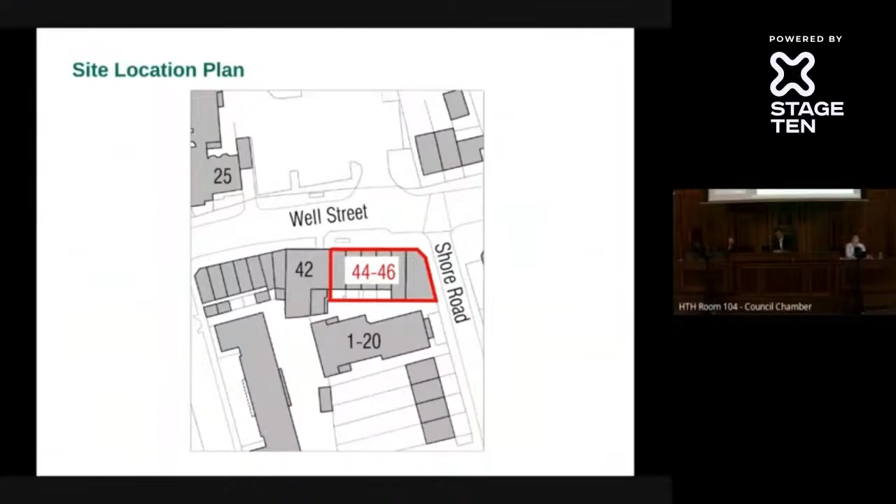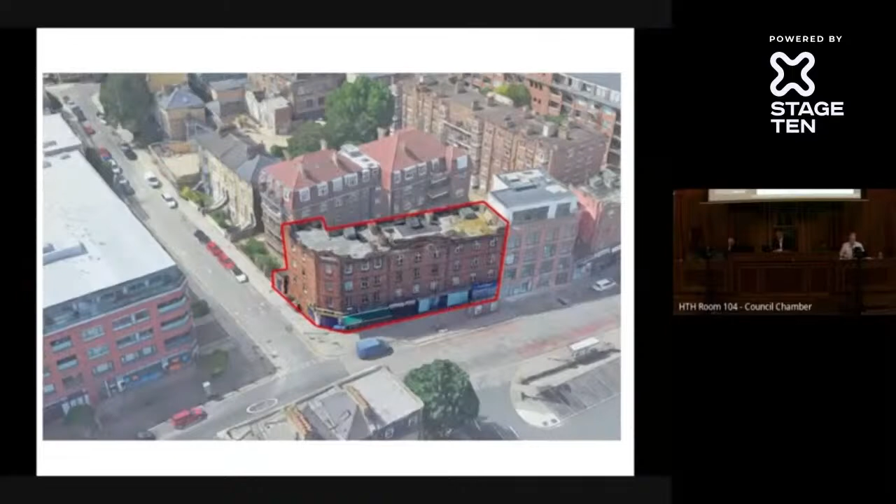So it's on the southern side of Well Street at the junction with Shore Road. This is just a photograph of the site. The application before us is actually for a variation of an existing planning permission, relating to this 4-story building which has commercial uses on the ground floor and residential above.

Just to run you through the existing plans - this is the elevation along Well Street, and then the rear, where the access to the residential flats above is located. They all have deck access, with entrances on Shore Street, which is just here.

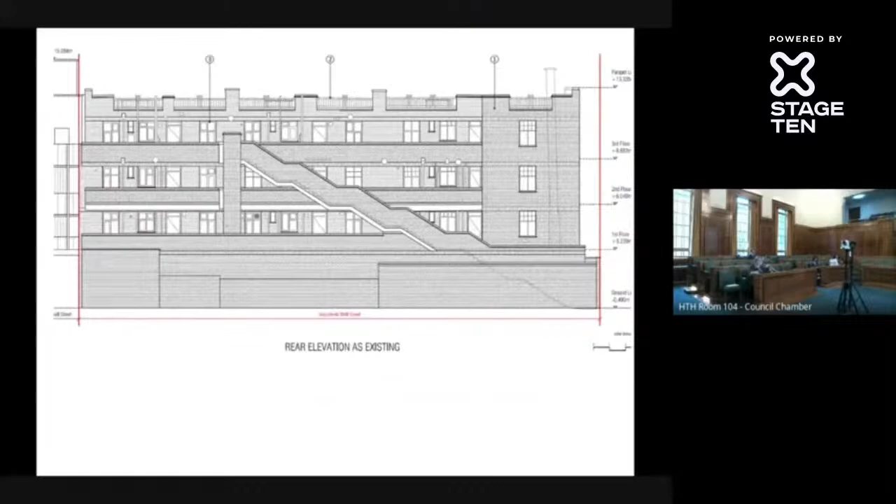Planning permission was granted in 2020 for the erection of a roof extension to create 3 self-contained residential units. This is what was approved, a metal-clad roof extension with windows along all elevations to provide the 3 units. That's the rear elevation - they were extending the staircase up into the roof level to get access for the new flats.

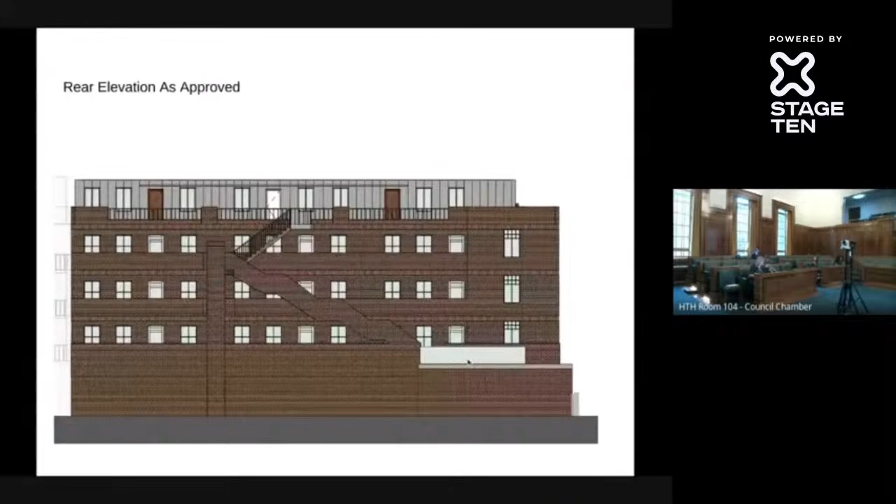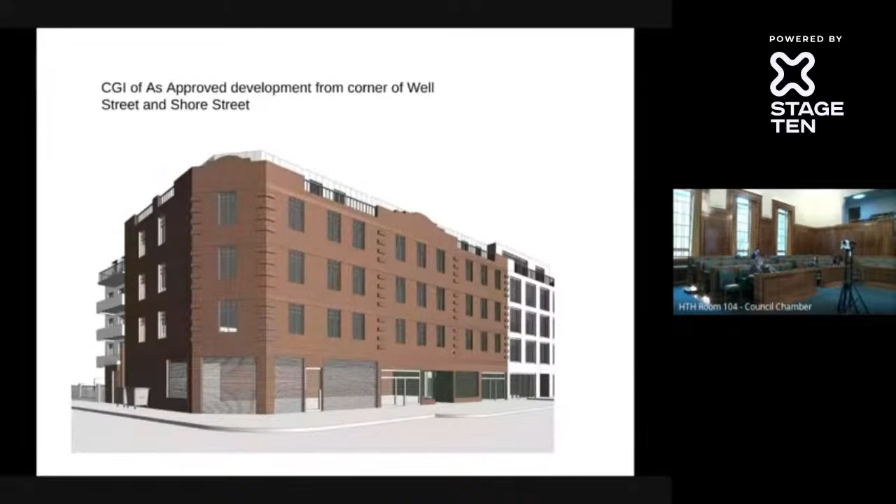So as mentioned, permission is now being sought to make amendments to the design of the proposal. It's important to note that when the application was originally submitted, a number of concerns were raised by both residents and design officers at the council, so we sought some amendments which were subsequently consulted on.

These amendments mainly related to simplifying the window openings on all elevations of the building, removing the glass boxes located to the rear elevation, reducing the height of the roof extension to bring it in line with what was approved in the 2020 permission, and also setting back the extension from the roof extension at number 42.

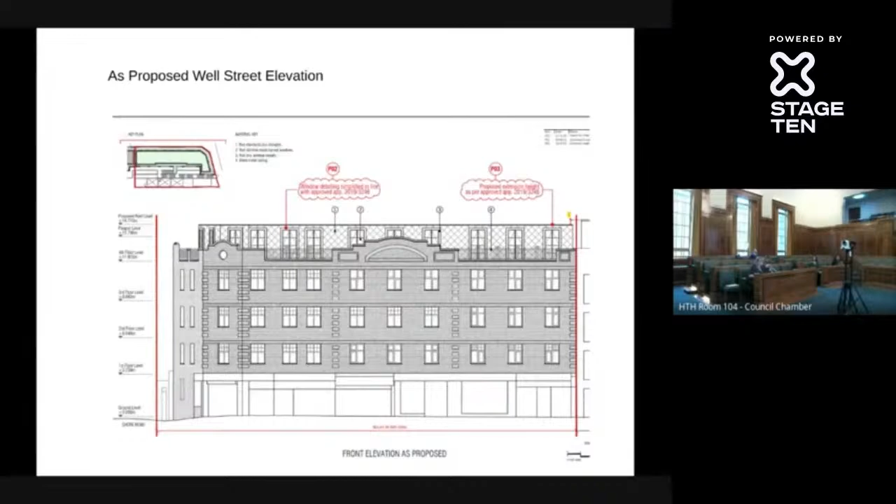So these are the plans which we are seeking approval for now. You can see that the openings along the elevations have returned to a flat top, changing from windows to doors which lead onto terraces located along the Well Street elevation. At the rear, the difference between the as-approved and proposed is that the number of window openings would remain the same, but the formation is slightly different.

Along Shore Street, the point highlighted earlier is where the extension terminated on the approved plan. The revised plan does include an extension here along Shore Street, which a number of objectors have referred to as an infill extension.

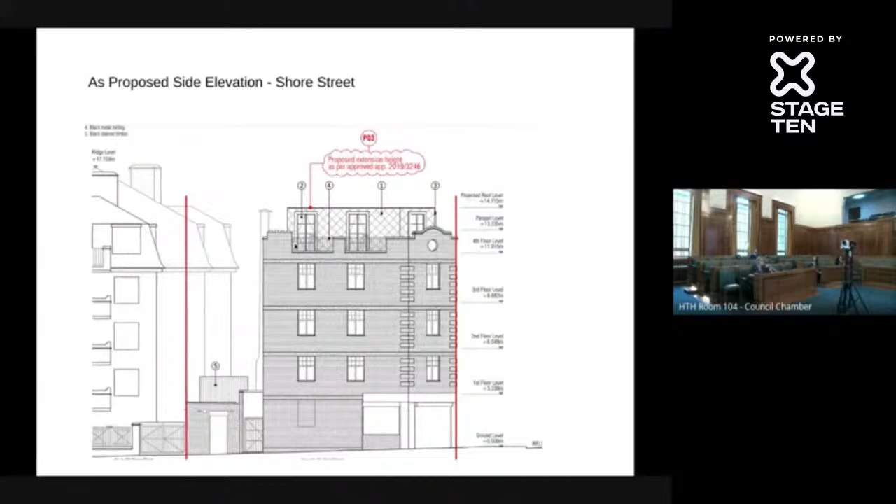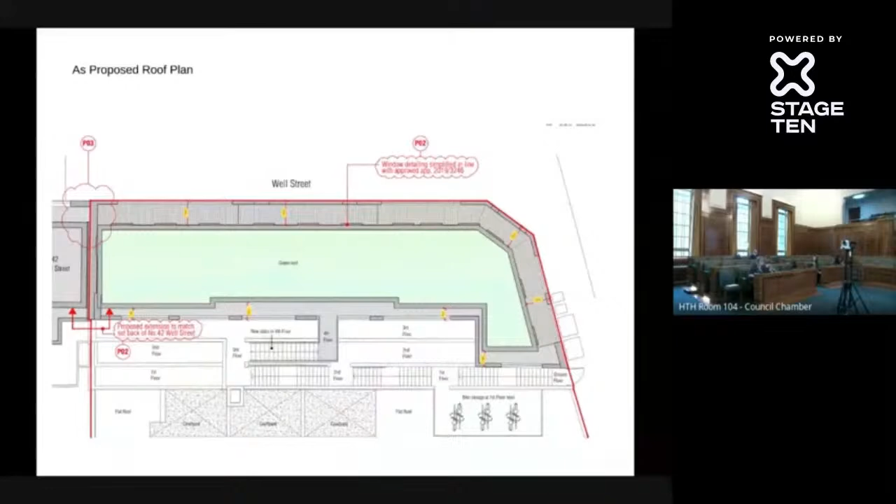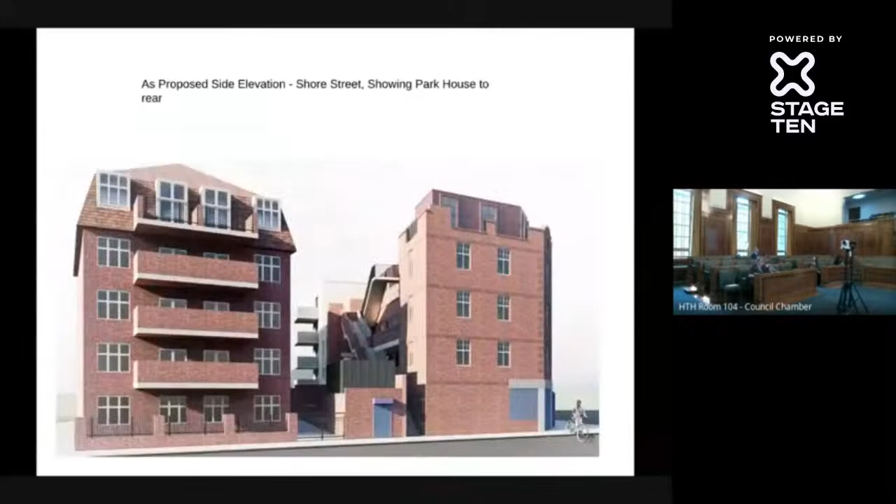This is a roof plan showing that the green roof would be on top of the roof extension. And then we have a series of CGIs to show what they're now proposing along Well Street, the corner of Well Street and Shore Street, along Shore Street with Park House on the left, and then a rear elevation.

Planning permission is recommended for approval subject to conditions, and we're also including a section 106 in this application because since the original consent was granted, we've adopted the new plan, which has new policy requirements including car-free development throughout the borough, and when creating new residential units, a contribution towards carbon offsetting. That's the only 2 points the section 106 is securing. So permission is recommended for approval subject to conditions and the 106.

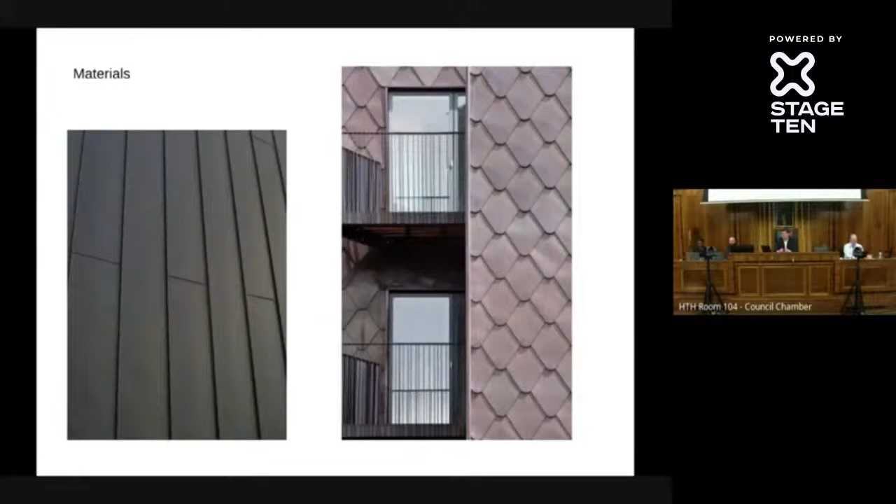I feel fairly neutral about that, is the answer. Great, thank you, Councillor Desmond.

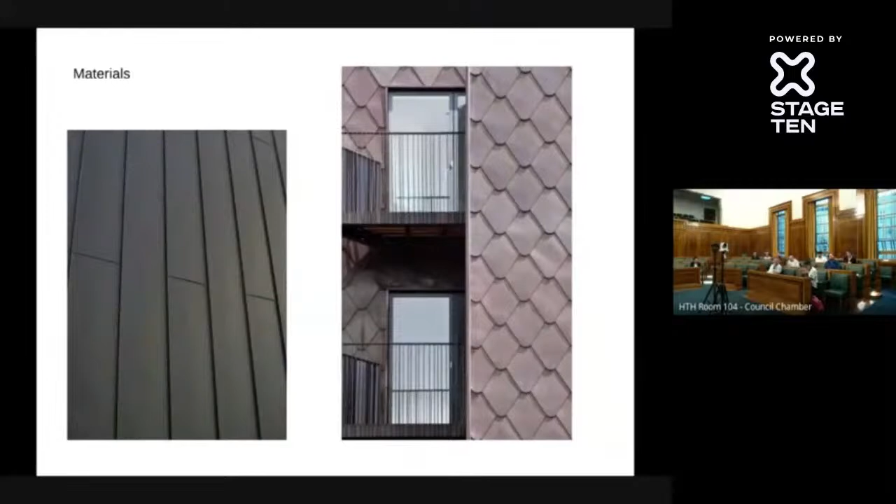The red zinc, I appreciate, is perhaps more in context with this particular building, but if you look at all the buildings down the street, which I think we saw in one of the earlier pictures, maybe picture 3, of Well Street, you'll see there are lots of roof extensions and they are all in grey and white. So in terms of the context of Well Street, I would say that potentially the red is slightly out of context there. I just wanted to draw people's attention to that - it isn't necessarily part of the line that goes along the street.

Also, in terms of the decorative frontage, maybe this is one for the architect - by bringing that massing forward, I suppose the view from the street means that frontage isn't seen very well. Is that something that was considered?

Let's go with the first question first - the materials extension. The design officer, Luciana, is on remote. I don't know if she wants to come in and talk about materials. Yes, I can cover that.

In terms of the quality of the material, we are very confident about the quality. I do see Councillor Joseph's point in terms of some of the extensions in the area being grey or white, but we think there is enough variety there because there is a mixture of rendered and light grey and darker grey, and also some slate roofs and some terracotta tile roof. So we feel there is enough variety that this particular change in material is not going to stand out. In fact, the warmer tone and also the smaller scale of the shingle detail rather than the vertical zinc cladding is probably more in keeping with a residential extension rather than a commercial one.

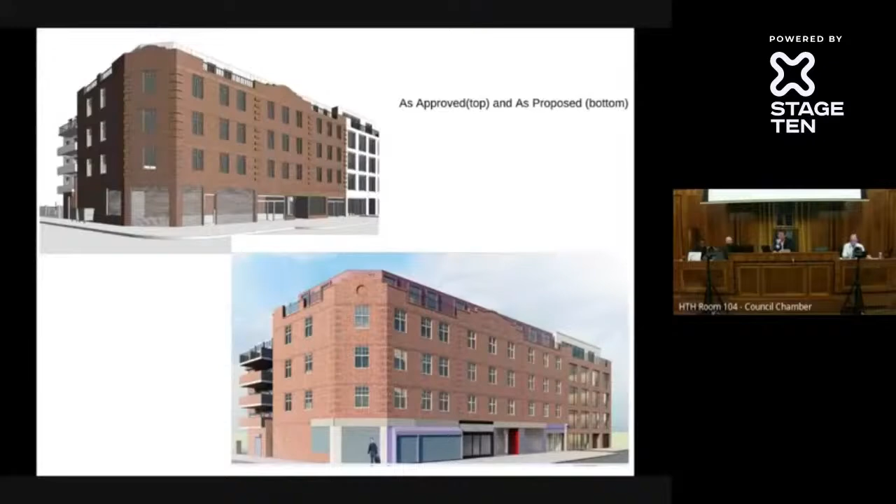And to me, it seems very unlikely in practice. Sorry, there has been some confusion about this because I read this. Can you set out clearly what the report does and does not talk about?

I think the confusion may have come from when you do a variation of condition, you carry over all the original conditions. One of the original conditions on the 2019 application was that no flat roof area shall be used as a terrace area, because in the original consent, the windows were just windows. They wouldn't have enabled access.

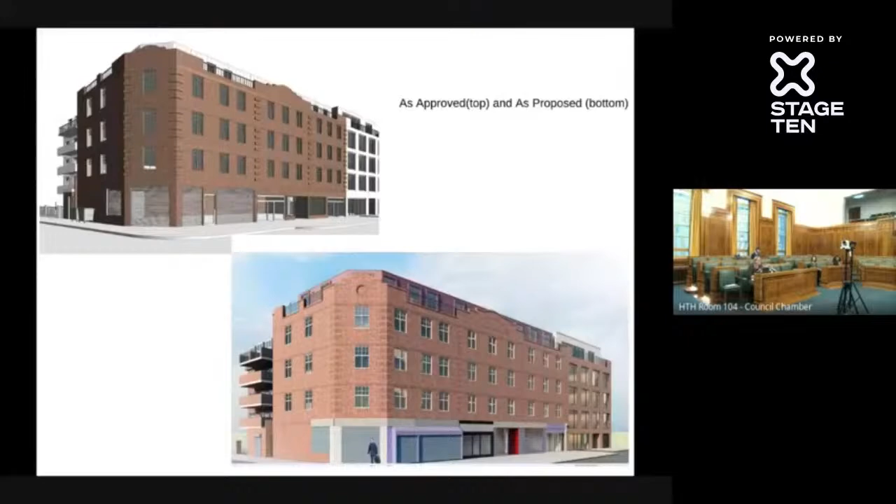On the plans now being proposed, they show terraces running along the Well Street elevation that terminate at this point here. So the condition's been amended so that this area and all this section along here is not used as an outdoor amenity area and shall only be used for access purposes, because if there were terraces on that side of the building, they would have the ability to look into residents in Park House. That's what the terrace condition has been amended to in the addendum to make that clear.

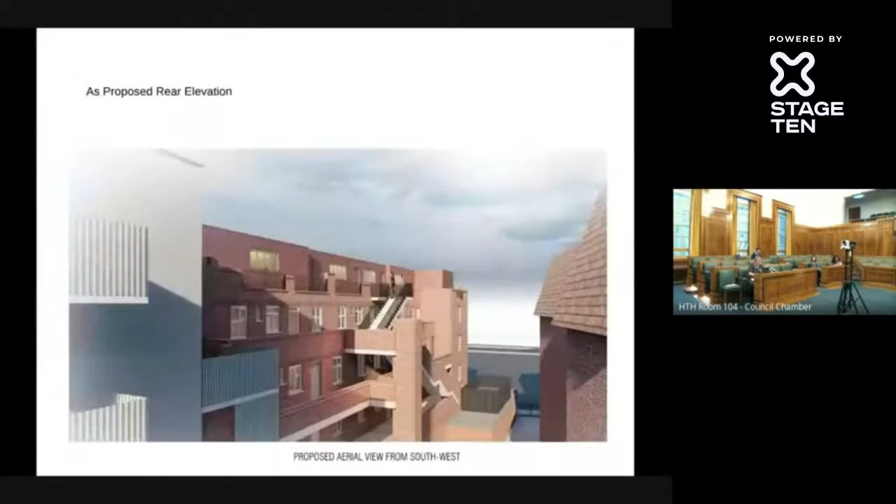But in terms of the terraces along the Well Street elevation, as the architect pointed out, a number of the roof extensions along this stretch of Well Street have terraces at that upper level. You can see that's number 42 - they've got a terrace. They've got a terrace at 40. And there's terraces along here, so they are sort of character of the area. Given the distance between this side of Well Street and the other side, there wouldn't be any amenity concerns, so we're satisfied with that.

That's clear, thank you. And then just the last question. The resident objector made a point I just wanted to get your view on. Is it correct to say that the design making up the new variation, so the rear extension part, is part of the reason that the planning application was refused in the first place? I know the architect mentioned the dimension setback had changed. Are there any other considerations beyond that that were relevant to this?

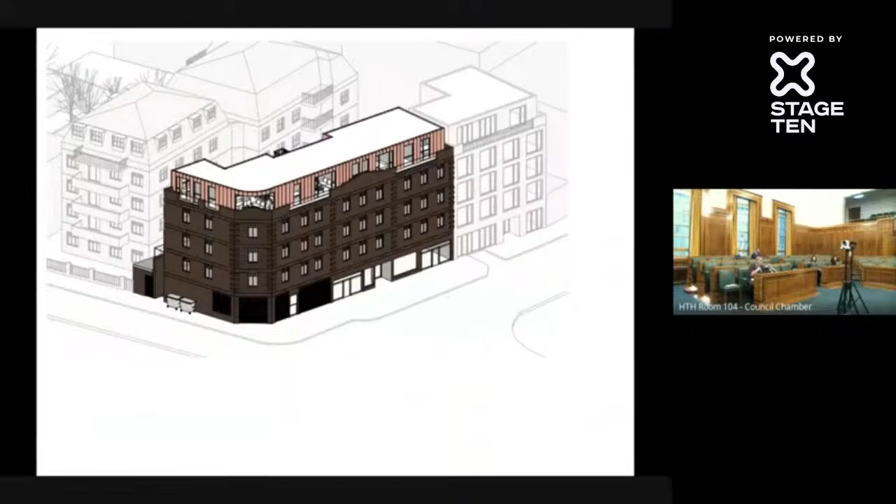And then along the rear, it was much more bulky here, and you can see it projects beyond the extension at 42 Well Street. So we're confident that the current variation does not go to the extent that this did, which was refused, and we wouldn't support this if it were to come in again. We're confident that what we have now is a suitable amendment to the original permission.

Okay, great. Councillor Joseph? Oh, sorry. Mark, did you want to come in? No, Councillor Joseph, thank you.

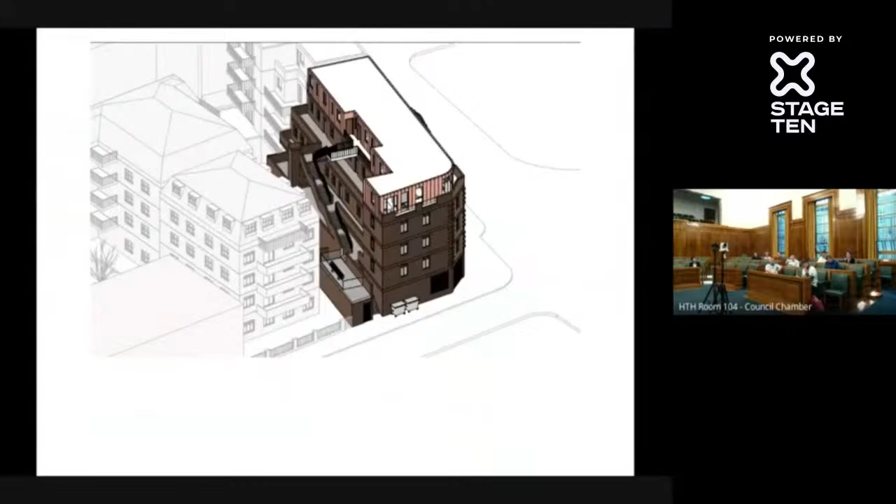Thank you, Chair. Yes, just two quick points please. The first for officers - I appreciate that we can't comment too much on the application that's been approved. We're not here to decide that's already been approved. However, since it was approved, fire safety regulations obviously become a big issue, sort of post-Grenfell. So what I'm slightly concerned about is the access arrangements to that extension. I can see this one staircase that goes past residents' windows really quite closely. Is there any other way of accessing the roof extension? Would there be another staircase?

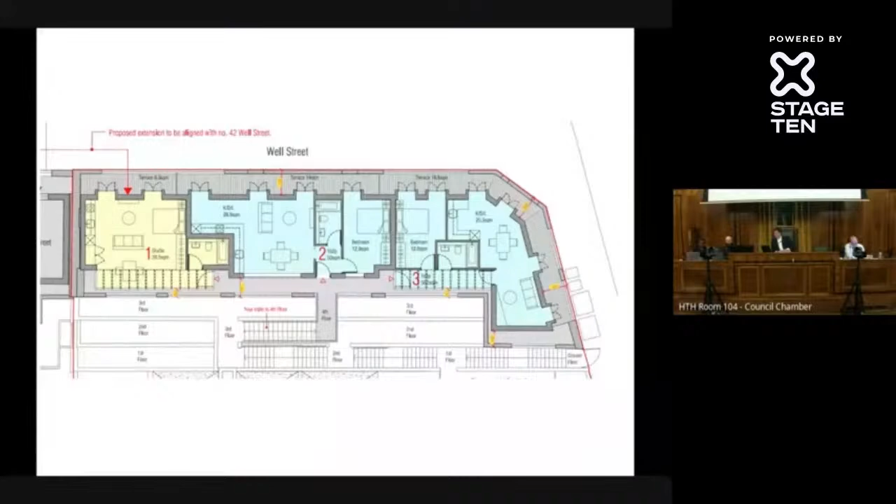Graham? Yeah, thanks. There's been lots and lots of changes post-Grenfell and rightly so. But in terms of where that leaves planning, there's stuff on combustible cladding, which is only on taller buildings anyway, but doesn't apply here. The staircase issue is something going through consultation at the moment, and that only relates to government consultations about buildings which are 30 metres or more in height that require secondary staircase access. So those changes haven't been agreed and don't form part of the planning or building control requirements as yet. The proposal is that they will be a building control requirement, but will obviously be reflected in planning drawings. It's premature to make a decision on that, and it only relates to taller buildings in any event.

Thanks, Councillor Joseph. I've got another one, but I don't mind waiting. My other one was just to the architect.

I appreciate that obviously the structural issues that residents have told us about, the leaks and so on, do not necessarily form a material part of this planning application. We can't make our decision based on that. But just in terms of goodwill, do you know if your applicant has made any attempt to communicate with the leaseholders in the building, or to try to negotiate - perhaps they may not be obliged to, but it may have been neighbourly and good management to do so?

Yes, I was not aware of the leaks, so I'm only made aware because of the objections. About structure, this is just a calculated opinion. You can see along this street there's 3 classic mansions, and the other 2 have accommodated the roof extension safely, I suppose. So all I can do is speak to the client, who promises he's going to get started right away to give it some weight and thought, and communicate more to all the occupants and stakeholders in this building. I'm not going to take any further conversation on that because it's not a material planning consideration, it's a building matter, I'm not even sure.

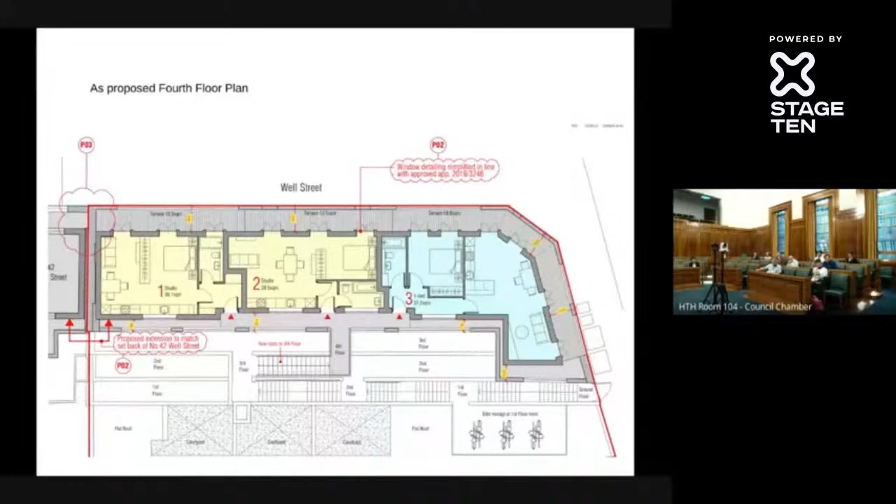Suggest you buy the building and design something yourself - well, we're talking about this application as it is now, it's not quite built yet. Councillor Webb, have you got a question? Why aren't they 3 one-bed flats, Chair? I don't think that's a question the officer needs to answer, it's not within our gift in this committee to talk about it because it's not part of the application. If you want to contact the architect afterwards, privately, you're more than welcome to do that. And it's already been passed by this committee previously.

Any other questions? I've got a few. Councillor Norcross. So one of the variations is on the windows to the proposed development. I was wondering, in light of one of the concerns the resident raised about light behind Studio 2, which faces onto the brickwork of the existing building, does the variation in the windows have any effect on the light, and are the light levels satisfactory in Studio 2? The number of openings is still the same, it's just the formation is different. Previously there were single windows and now they're like a pane of 4 windows, so the light would still be the same. That's Studio 2 on the plan there, so it is dual aspect and they have 3 full height windows facing onto Well Street, so they would receive a sufficient amount of light.

Just to ask about daylight and sunlight - you will have heard the objectors reference that in terms of it not being done. Is that right? Because there was no increase in the height of the extension in terms of the impact on neighbours, it wasn't considered necessary to ask the applicant to do a daylight and sunlight report once we'd received amendments that we were happy with, because we were content there wasn't a need for it.

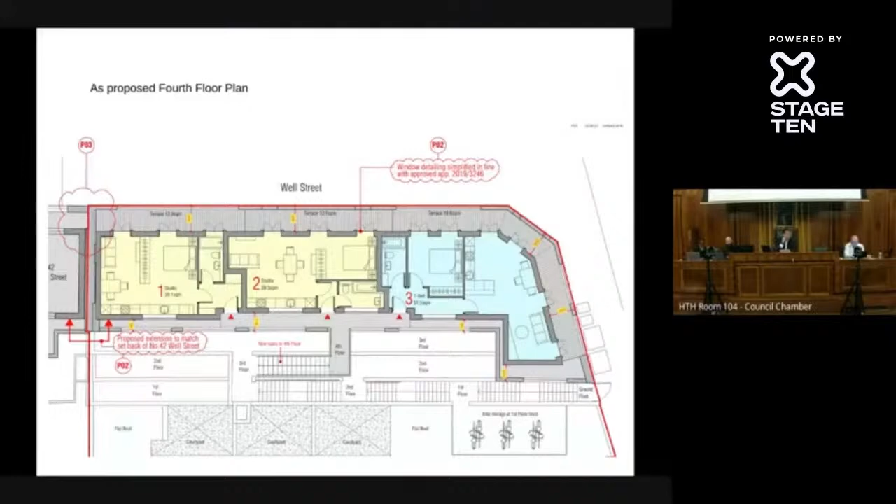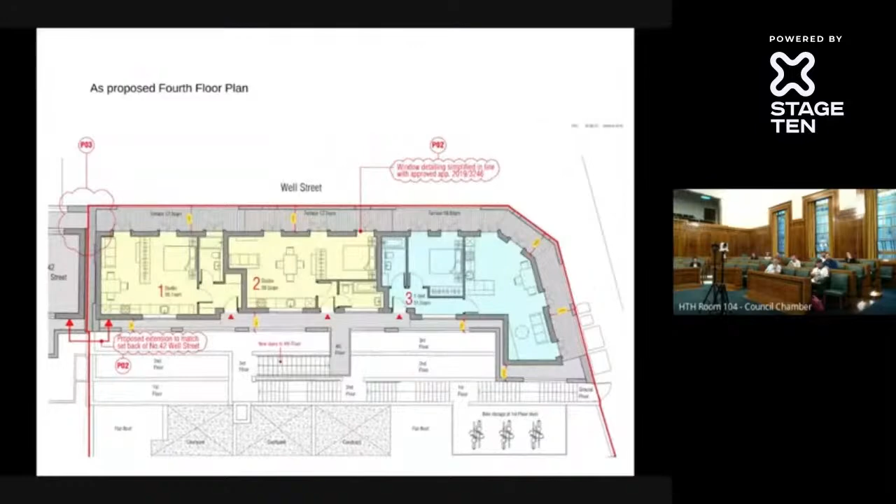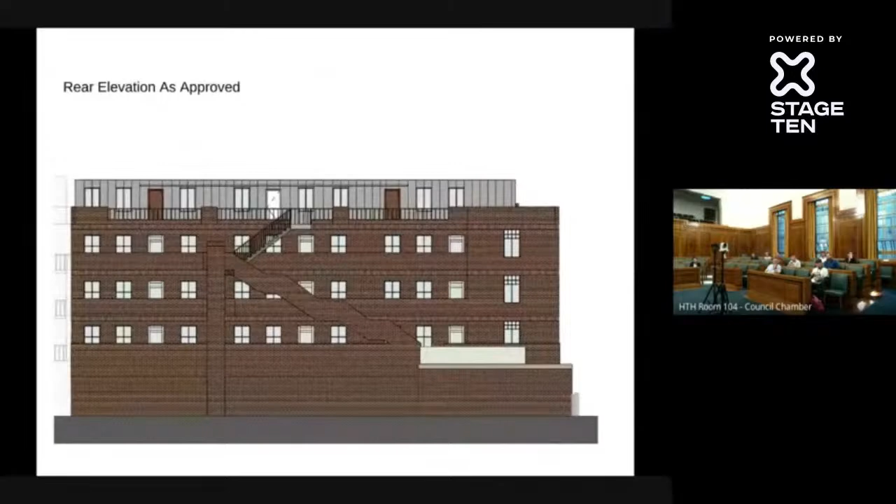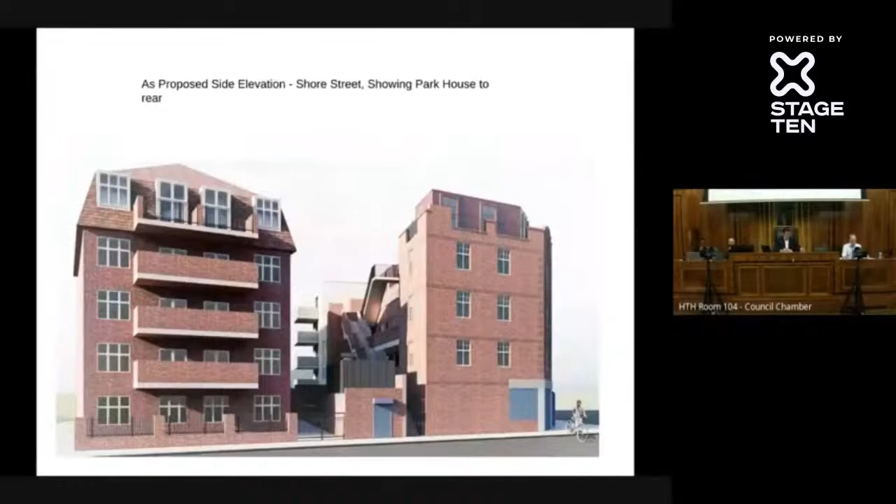Any other questions from the committee? Waste collection, waste disposal - are we content around the space and storage? There haven't been any changes to that as part of the original permission because there's no change to the unit mix, so we can't request any changes. Okay, thank you very much.

I think that's everything. Go on, Councillor Marcos. This might be a tricky one, but just on the bike storage - the cladding is changing. Is that the only change, and are we happy with first floor bike storage? This is the first time I've seen that on an application. Is that normal? Do you literally have to carry the bike up the stairs? Is there a ramp or anything?

It's not ideal having it at first floor level, but that was what was happening in the original application, so we're limited as to what we can change. There has been a reduction in the cycle parking - the original permission allowed for 10 spaces, and now they're providing 6. They're actually only required to provide 4 based on the number and mix of units, so they are exceeding their requirement, but it is less than what they originally proposed.

What's the rationale for reducing the bike storage in the new application? I think it's that it'd be more usable space. Fitting in 10 into the same space would have been pretty tight.

Okay, any other questions from anyone? No, okay, thank you very much. In that case, we will move to a vote. The recommendation summary is to grant planning permission, subject to conditions and completion of a legal agreement. All those in favour, please raise your hands. Thank you. Against, please raise your hands. Thank you, and no abstentions. Okay, great, thank you very much to everyone who came to listen and participate this evening.

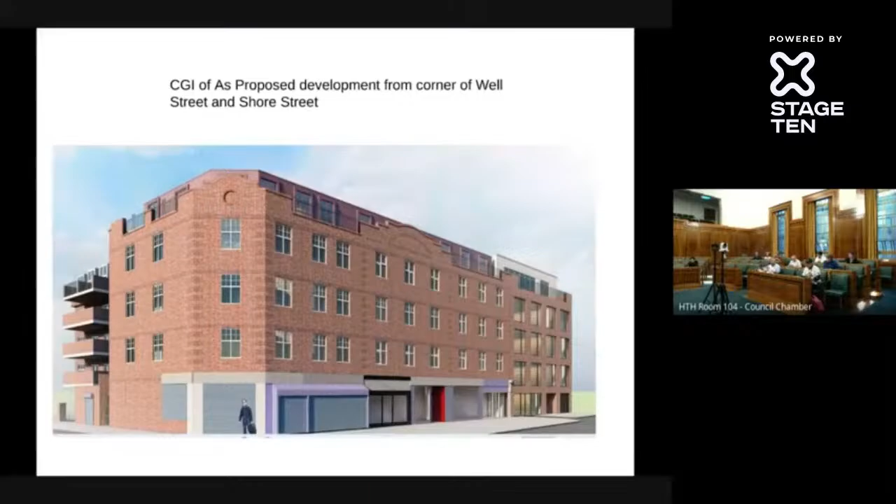In that case, we move on to item 6, which is the delegated decisions. We have 3 sets of delegated decisions, including the one that was incorrect from the last meeting that was sent back - from 10th of February to 19th of March, 20th of January to 9th of February, and 21st of December to 19th of January. Do we need to note that? I think if I ask for any comments on any of them, and then we'll note them together.

Has anyone got any questions, Councillor Desmond? Superficially, I was slightly concerned on page 90 about the refusal of a painted sign, because businesses have had difficult times, and this is a property in Church Street, which is of course a conservation area, and a painted sign might be apt. But then I just looked it up and saw it was Foxton's. So, I would quite like some information as to what they proposed and why we refused it, because we obviously want things to be in keeping, and it says painted sign, and I'd have thought that would possibly have been in keeping, but I'd need further information.

What's the process if someone has an issue about this and just wants more information? Well, documents regarding delegated decisions would have to be amended from the planning service. So I suppose the question is more, you just want more information about why. I would probably email Natalie and she can cascade it to the right person. That's great, thank you.